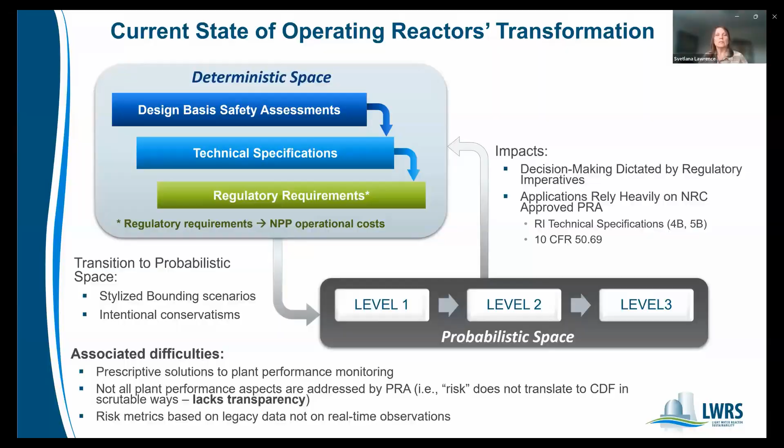So again, we started thinking, well, what if we use a performance-based approach to supplement our reliance on risk-informed approaches? So the idea of a combined risk-informed, performance-based approach is not new.

The Commission specifically defined the performance-based approach in SECY 98-144. And the performance-based requirement is one that is relied on measurable outcomes. And in turn, we gain flexibility for plant operation. So if you read SECY 98-144, the white paper, how we call it, on risk-informed and performance-based regulation, we see the 5 large points in this RIPB approach.

The first, it focuses attention on the most important activities. So that's what we get from the PRA model. It helps us to understand what at the plant is important.

It also establishes objective criteria for evaluating performance. And right now, we do have criteria in terms of delta CDF and MSPI and some other criteria, but they are not robust enough to cover all the performance, different set of performance and different operating conditions. So it also allows us to develop measurable and calculable parameters for monitoring system and licensee performance.

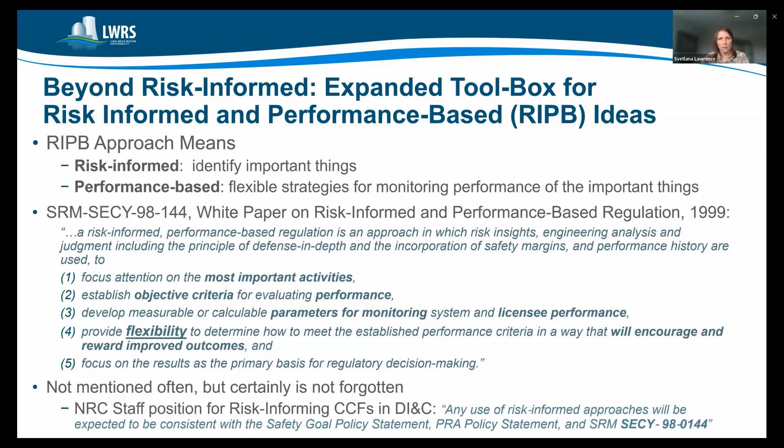So a few specific benefits from performance-based ideas. The performance-based approach is based on the idea of real-time observations, and those real-time observations can be used to validate the accomplishment of the defined objective for system performance. And that is opposed to reliance on prescriptive rules for system manufacturing or for system performance.

So instead of saying, well, you have to test this system twice a year, right? That is a prescriptive rule. Instead of that, we can say, well, the system shall produce 250 gallons per minute to meet the functional requirements for the system to accomplish the function it is designed for.

The performance-based approach also can be used for design activities, so it can be used for licensing activities and oversight activities.

The idea of margin between the current operational state and the limit state becomes very important. This margin represents the acceptance criteria or success criteria in PRA terms. And the performance objective is characterized by the requirements associated with that minimum accepted margin, between the current state and undesired state.

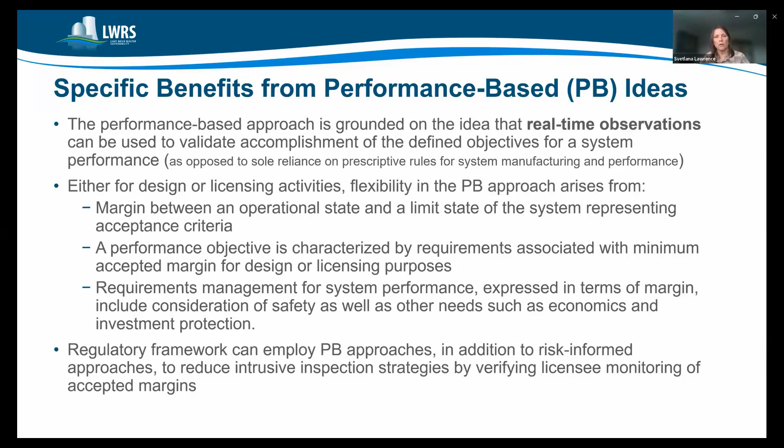So how plant conditions change during the scenario progression. And again, the benefit here, if we use the dynamic approach and run multiple scenarios, now we don't have to define the bounding condition. We don't have to use so many assumptions that we use now that put us in this conservative state at the end, as a conservative result.

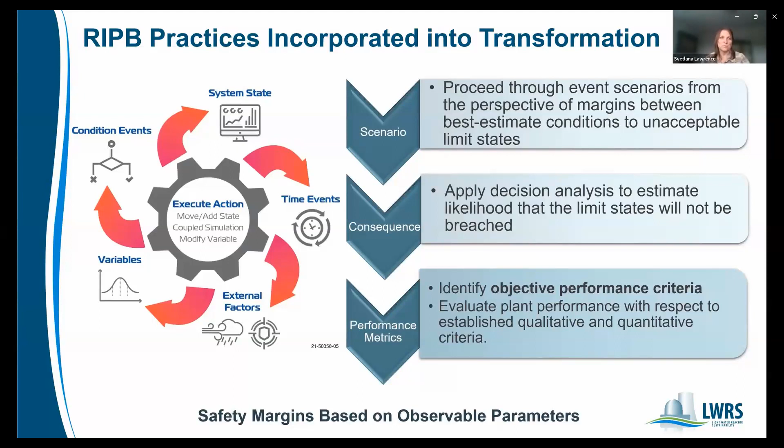So I talked about safety margin a little bit. I mentioned safety margin as a basis for performance-based approach. If you think about safety margins, it's not a new concept. In structural performance, in the structural world, that has always been employed. We have the loads that we understand, and we have a system capacity. And ideally, you want to keep the load as far away as you can from capacity. Well, that is the margin.

So the distance between the load and capacity, that is your safety margin. Again, when economics become a concern, you don't want to over-design your system. So you do want to keep them reasonably far away, but you also want to make sure you don't spend extra money to design for extra capacity unnecessarily.

And this margin exists, for example, in concrete performance. The crack size is the measure to evaluate degradation of margin. The same with metal performance, or in component health, the remaining useful life can be the measure of margin. Similarly in 10 CFR 54, the aging management rule, we can establish the available and acceptable level of margins that we want to monitor for aging as an aging management program.

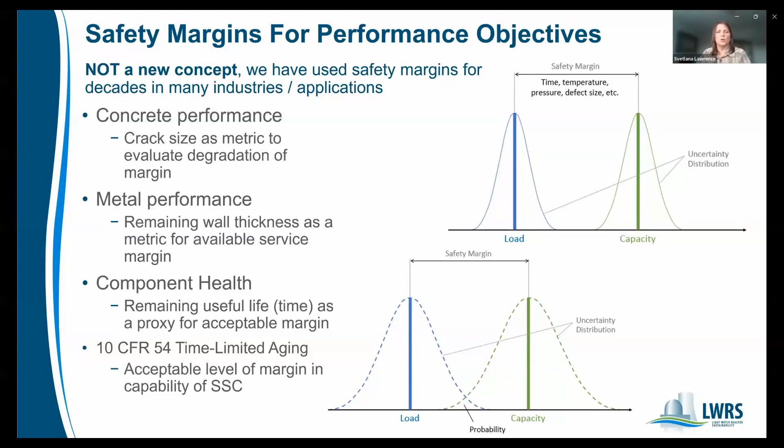So when we talk about a performance-based approach, what exactly does it mean? Here I'm talking about just a short example. In the traditional way, we say we need to inspect the section of piping, and we prescribe details and dimensions and materials and what non-destructive examination to use, what section, what area of the plant needs to be examined, and the frequency.

These are all very prescriptive approaches, and if you read the GALL report for aging management programs, they are very large volumes of requirements associated just with aging management programs. So the performance-based approach is different because it establishes objective criteria for evaluating the condition, and then we develop measurable parameters to monitor the condition. Then the licensee determines how to meet those established criteria. The regulator has a say in this process because the regulator accepts the parameters established for system performance, and the regulator also has to agree to the objective criteria for evaluating the condition of this component.

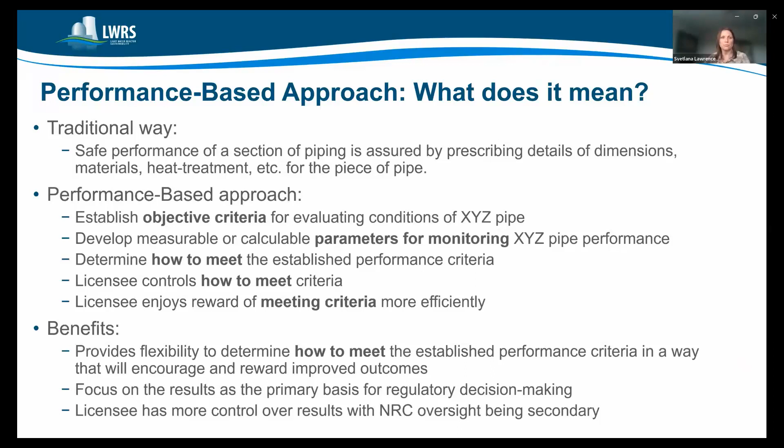And that is put in simpler form. So we're saying that in the system hierarchy, we start with the mission, and the mission of the system is the top priority. Then we decompose the mission, which is to protect the public and protect the environment. We decompose it to safety functions of the system, and then determine how the system should perform to meet those functions. Then the components are designed and monitored based on their capability to accomplish the system performance. Right now, we have very few requirements at the mission level.

It's basically just the overall CDF, LERF, and defense in depth. Then we drill down, so more detailed requirements are applied at the system function level, and more requirements are applied at the system performance level. But the majority of current requirements from the reactor oversight process actually apply at the component level, and that goes from manufacturing of the component, designing the system, and monitoring performance. So most of the requirements belong here, at the component level.

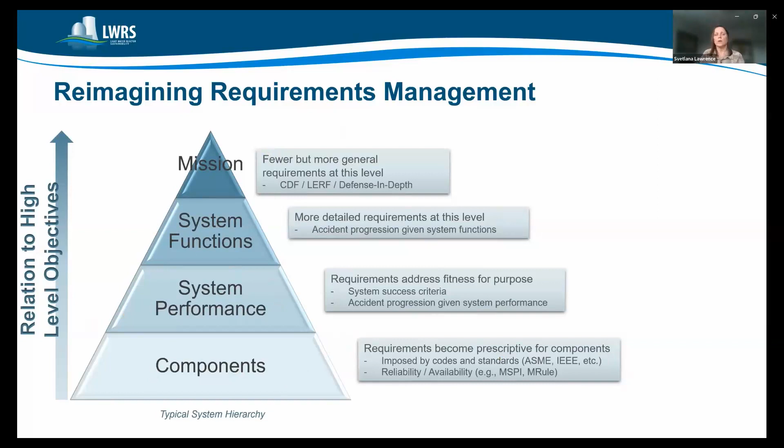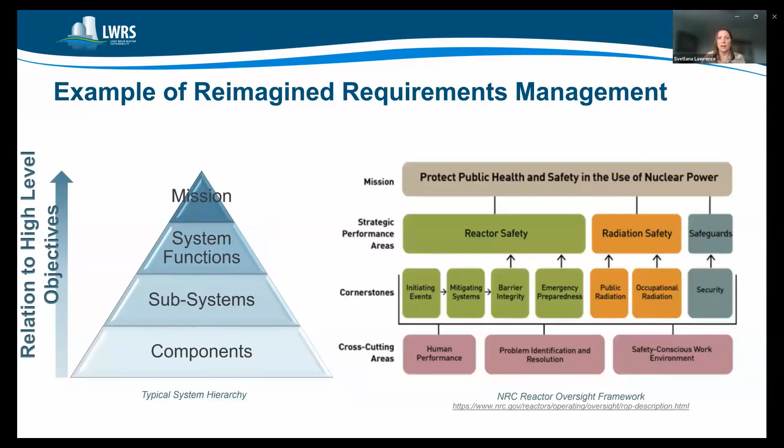So the idea of a performance-based approach is, what if we focus our attention on the top level of the hierarchy, on what we need to ensure? We need to ensure the mission, and we need to ensure the fundamental objectives of functions, right? So reactor safety, radiation safety, and safeguards. But how? That is where licensees could gain more flexibility as to how they accomplish the what.

So all this bottom level could be left, maybe not entirely to the licensees, but licensees could have larger flexibility in deciding how to achieve the performance objectives at the system performance level, and certainly at the component level.

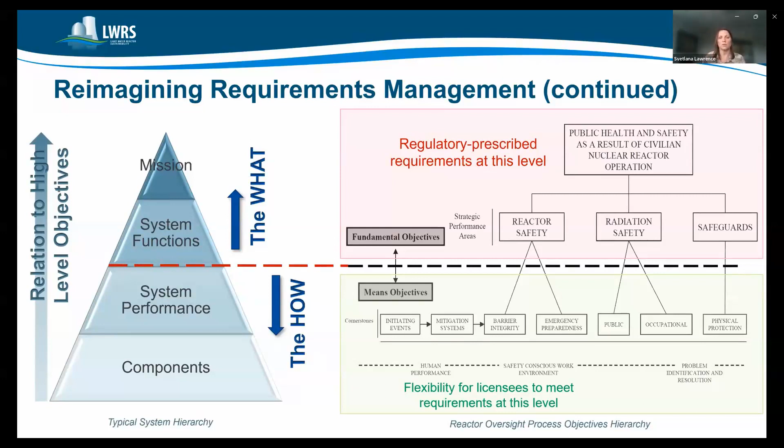So right now it's a good time to think about a performance-based approach for operating reactors, because that is the approach advanced reactors are moving towards. If you're aware of the licensing modernization project, the performance-based approach is an essential part of that project, of that approach, where the risk is no longer measured as a core damage frequency.

Well, first, because it may not be applicable to all operating reactors, or to all the new reactors compared to the operating reactors. And the risk is measured as something phenomena-based, so it's in dose. And the frequency still remains in place, it doesn't go anywhere. But again, the consequence is not measured in a surrogate metric like CDF and LERF. The consequence is measured in something physics-based, dose.

The idea behind LMP is heavy reliance on phenomenological modeling and simulation, which reduces reliance on assumptions and uncertainties. And the way we can think about application of the licensing modernization project to light water reactors, you can think, well, what if we apply the same approach, the same methodology, but not for advanced reactors, but for operating reactors?

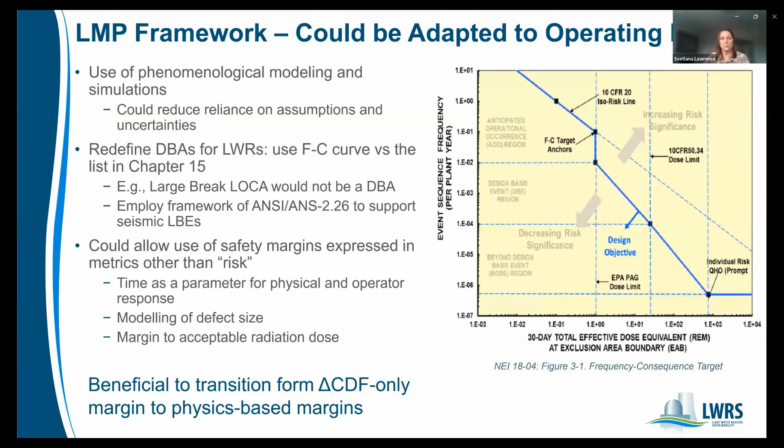Couple of examples for cost savings opportunities other than just reassessing our design basis accidents. So, equipment maintenance. We are, as an industry, transitioning to performance-based equipment maintenance, and we're able to do it fairly simply

But if we think about the performance-based approach, if we monitor the system performance, it can be done the same way regardless of safety-related or non-safety related. We understand the condition of the system, and then we evaluate the progression of the system health or degradation of system health over time. And we understand where the margin is between the current observable condition and the undesired state.

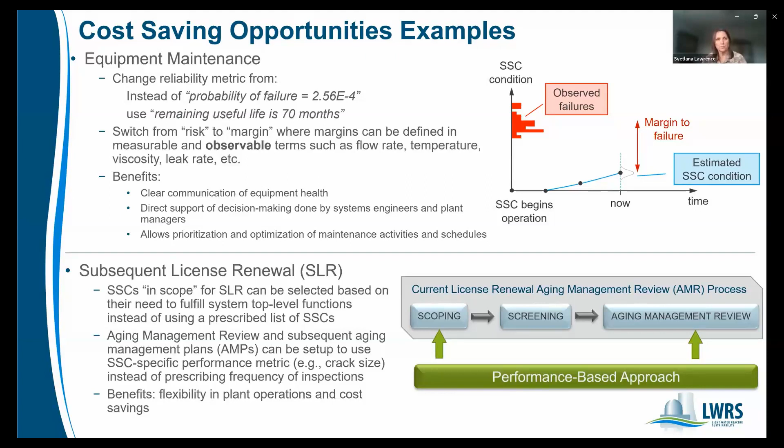A few other opportunities are listed here, I won't repeat them all, but the idea is that we can use, for example, equipment qualification redefined from NQA-1 requirements to using performance-based options for equipment manufacturing, equipment testing, and equipment maintenance.

Same with specification management. So instead of relying on outdated specifications that were originally designed at the very beginning for the plant, now we're trying to replace a system at the plant, and we're still relying on the specifications developed for the original system. Well, instead of prescribing parameters for each component and each system part, maybe we should focus on the system performance and allow the vendor of that system to find the most efficient way to achieve the functional performance we need to achieve.

And this would allow vendor flexibility, and it would allow us the flexibility to choose from different vendors and different systems, and we expect that it will provide significant cost benefits.

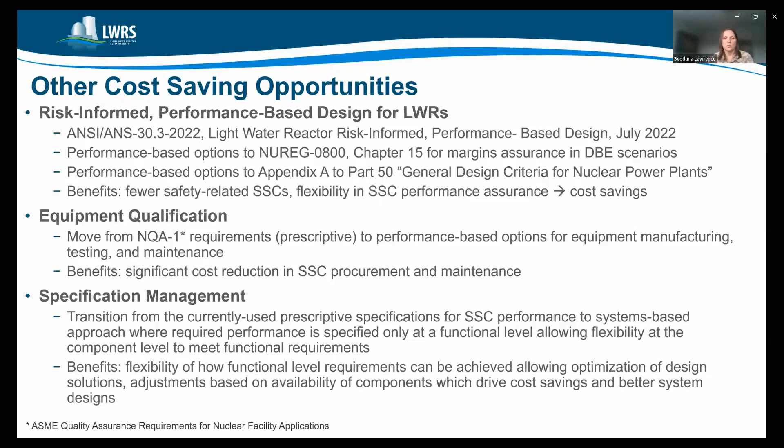Now let's talk a little bit about the standards. I will start with the ASME Section 11 Division 2 standard, which is a risk-informed performance-based approach, compared to the Division 1 standard, which is a risk-informed in-service inspection program.

So the Division 2 program goes hand in hand with the LMP-like approach. It doesn't mention an LMP approach, but it is implied that the performance of a system and performance of each component shall be guided by the overall plant performance.

And we call it a reliability target. The plant level targets are informed by expected component performance, but the component reliability target is set to ensure that overall plant performance is adequate and corresponds to licensing requirements, investment protection requirements, or whatever set of requirements the plant selects.

So again, if you think about the LMP approach and frequency consequence curve, you start with the plant level. The dot on the FC curve represents the plant level performance or plant level reliability target. And then you decompose your plant level performance into the system performance and the subsystem performance level, all the way to component performance level.

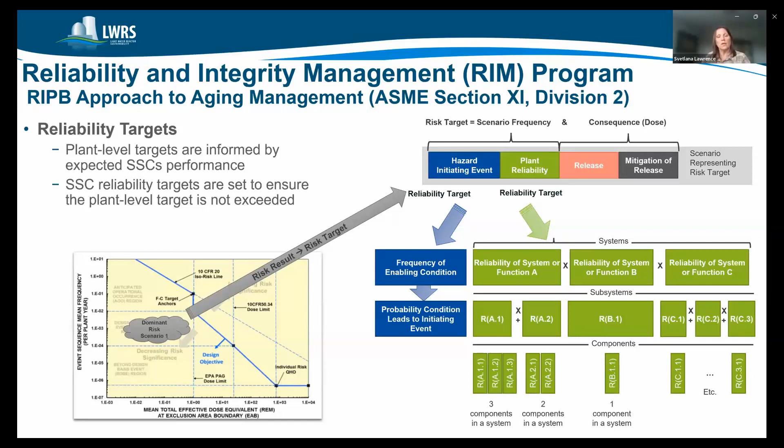If you think about it, there are millions of ways to achieve your plant level performance by varying your component level performance, meaning you have a lot of flexibility at the component level to choose your materials, to design your plant, or to choose your monitoring strategies for component performance to ensure plant level targets are met. That's where it becomes really important to establish this bridge, this connection between the function and the component health, between the system health right now and the functions that the system is supporting.

So this numeric reliability value or reliability target is not observable. Even though the ASME standard requires you to establish the reliability target for each component, I cannot really observe 2.5E-6 as a reliability target. So we need to establish a performance criteria that I can monitor.

Either, let's say it's a wall thickness, 0.5. That is something I can measure using multiple non-destructive examination methods, and I can propagate them through modeling and simulation to predict what will happen next and the remaining useful life of that component.

So the risk-informed performance-based approach is the solution here. That is the bridge between the observable, measurable, calculable performance of a system or component and the resulting reliability of that component that needs to be established.

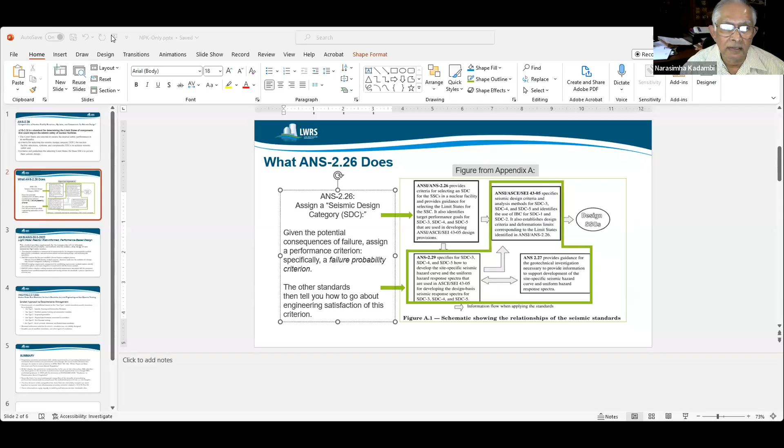So everybody, the key takeaways from Lana's part of our presentation is to establish that margins are an essential aspect of incorporating a performance-based approach. She pointed out many opportunities for cost savings in operating reactors licensing if the performance-based aspects are included with the risk-informed practices for meeting requirements.

And these requirements may be related to continuing design decisions with operating reactors or with regulatory decisions also. She addressed how the application of these ideas can be extended to standards using the ASME RIM program as an example. The same ideas are equally applicable to ANS standards, and I would like to offer some examples of that.

What you see on the slide here is related to ANS 2.26 on categorization of SSCs for seismic design. Now, this standard was issued way back in about 2005. I consider it to be the first risk-informed performance-based standard.

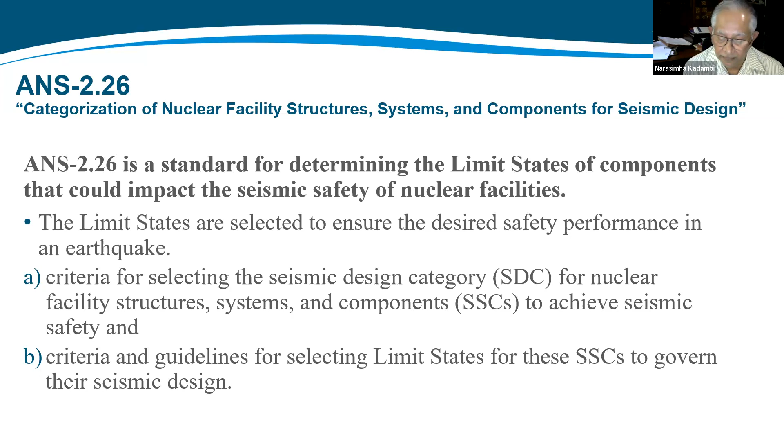226 actually just provides an architecture for the application of several other standards. And these others include two ANS standards, 229 and 227, but also a standard from the American Society of Civil Engineers, 4305. So this is an example of how we can build risk-informed performance-based approaches into suites of standards. Next slide, Pat.

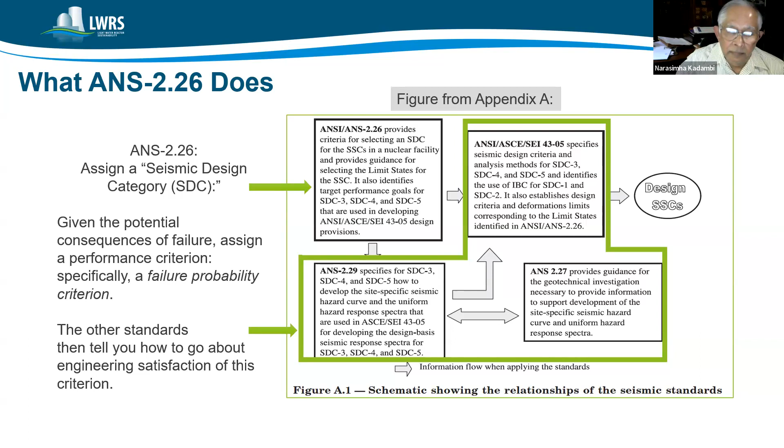The next standard I want to talk about is 30.3, and this has to do with the risk-informed performance-based design of LWRs.

This was recently issued just last year, and I think it's the most recent ANS standard. It is now being reviewed by NRC staff, and we have received the first round of comments from NRC. This standard represents an example of implementing the hierarchical requirements management that Lana spoke about.

The most important point from the point of view of the user of ANS 30.3 is that it focuses on a performance-based decision-making process. It calls for a formal decision analysis process, and it is structured along hierarchical lines. And in order to maintain the rigors needed for regulatory compliance, this structured decision making is formalized.

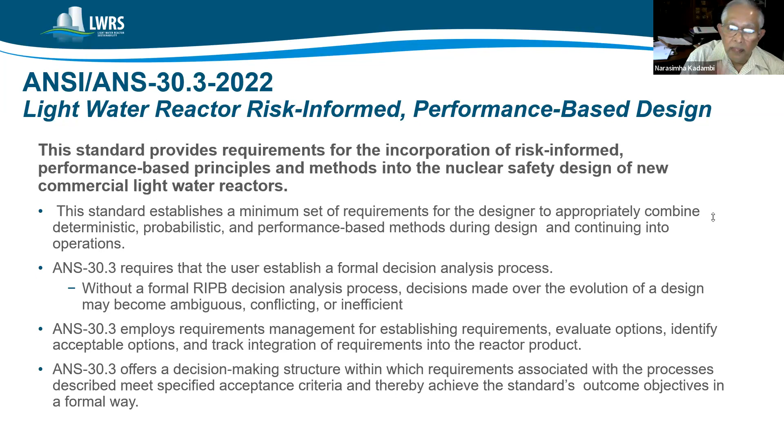So ANS 3.5.1 represents an example of implementing a graded approach to requirements management. The user of a standard who wants to use RIPB ideas will likely choose use type 3, 4, or 5, that is as an engineering simulator or a simulator for plant hardware connected, and for non-operator training. But the requirements in the standard, because this is a voluntary consensus standard, are not binding unless the user invokes the standard for some purpose, generally related to meeting a regulatory purpose. So the user of the standard has a lot of flexibility in its use.

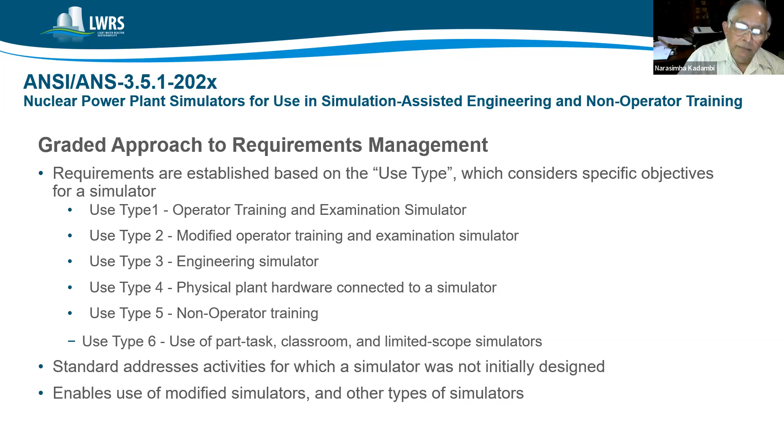So, in summary, although the Commission called for changes in the regulatory approaches almost 25 years ago, the conventional regulatory practices are really what most applicants and licensees encounter when they interact with the staff these days. And we are finding that to be the case with ANS 30.3.

Industry itself has been talking for some time about modernization, but industry generally identifies modernization, especially after the Nuclear Energy Innovation and Modernization Act, as something that is primarily risk informed and ignores the benefits of a formal performance based enhancement to these existing approaches. And there's no benefit from the existing NRC issued guidance on performance-based regulation.

But I would think that these days, with activities such as the license renewal of Diablo Canyon, there needs to be a shift of focus from just risk considerations to one that includes formally defined safety margins, especially with regard to implementing the requirements of 10 CFR Part 54. So I think there's a confluence of needs between operating reactors and the standards that we are working on in ANS.

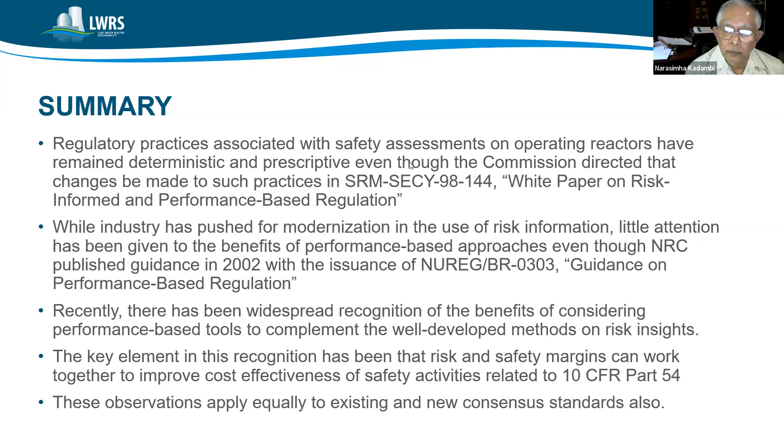Most certainly. So I think our first question is by Ralph Hill, and he asked to clarify why there are two reliability targets, one for hazard initiating event and one for plant reliability.

Well, okay, Ralph, I have to plead ignorance in terms of answering your question, because this is really something I think associated with the ASME standard, and unfortunately Lana is not here, and she would be the one, because she's more knowledgeable about it. In fact, I would think that you would provide a better answer than I could, if you thought about it. But I just don't know. So we'll just move on to the next question.

Well, Prasad, before you do, why would there be any limit? This is Jim August. Why would you limit it to having a single target? Or Ralph, if you're available still.